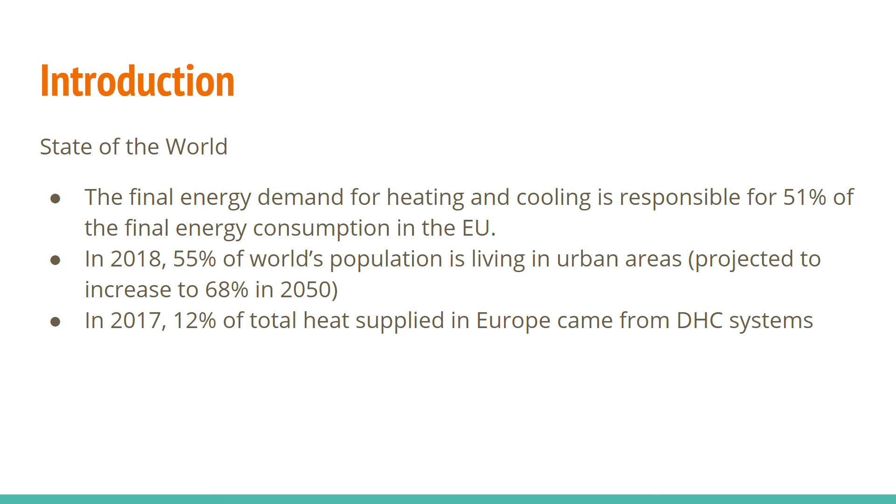And this is definitely expected to be a hot topic because in 2018, 55% of the world was living in urban areas, and with this being increased to 68%, that means a greater demand for heating and cooling in these large buildings in the urban areas. And with only 12% of total heat supplied in Europe coming from DHC systems in 2017, there's a lot of room for growth in this area that can make the system for heating and cooling more efficient and more environmentally friendly.

So what exactly are district energy systems? Well, they encompass electrical, gas, and thermal systems that are constructed in urban areas that help distribute flows through the power grids and pipe networks. So if you see in the figure, there are 4 arrows. There's one for the electrical network, a transportation network that includes the electrical vehicles, and there's also the district heating network that we will be discussing specifically for these two papers. And then there's the gas network, and this is how the urban areas are connected. They communicate with all these different resources to power the day-to-day.

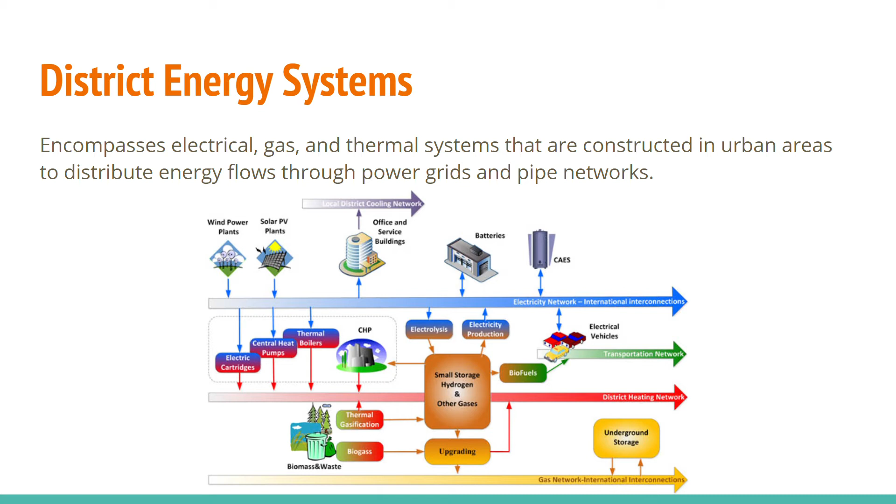And the paper's focus is on the DHC networks, and that's specifically the thermal system in the district energy system. What they are is a distributed underground network of pipes that deliver cool and hot water, and the water would help heat and cool homes or offices and business workplaces. And if you see on the right, there's also opportunities for waste heat to be utilized for this network towards heating and cooling, such as sewer waste heat being redirected towards the water heading to the residential homes.

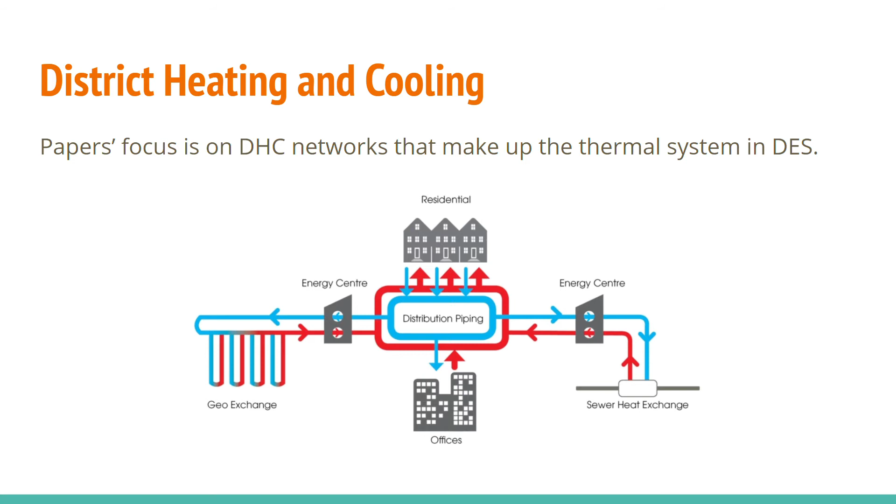So DHC networks have come really far since the 19th century when steam delivered heat was first considered, and in generation 2 the steam was replaced with highly hot pressurized water, and then that moved to generation 3 where we used less hot water, and we built more durable pipes to survive the high temperatures, which required a lot of insulation and durable materials. But despite that, we still faced high wear and tear of the pipes due to the 80 Celsius water. And despite very high efficiency at the generation level of the heat, when distributing the heat there's 10 to 30% losses.

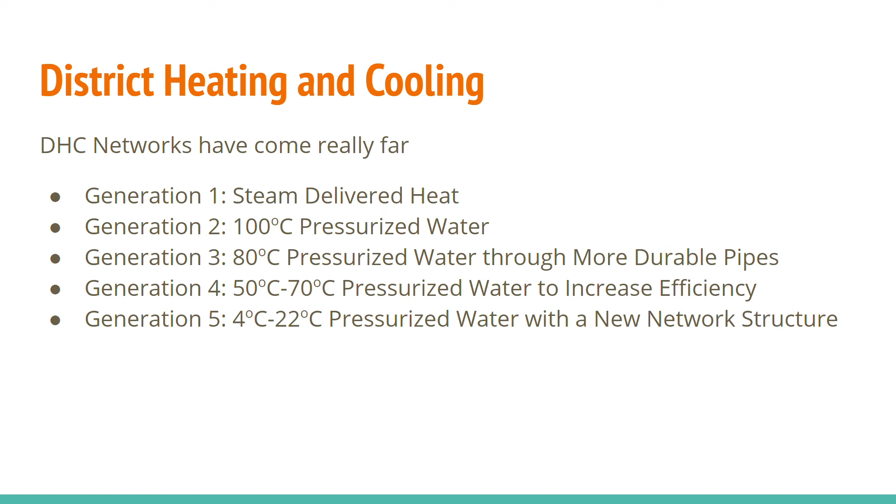So that's what generation 4 helps to solve. With lower temperatures, we increase the efficiency because pipes are worn down less. But generation 4 comes with its own issues, including the fact that 2 pipes are still required, one to send hot water and another pipe for cold water. And like all the systems before it, it has only one central station that heats up the pipe's contents to the desired temperature. So in generation 5, we want to tackle these 2 issues faced by generation 4 with a new sort of network structure.

So the new networks are comprised of heat storages that can store excess heat away for future use. And the pipes are now cut in half. Instead of 2 pipes, there's only 1 pipe, and it's bidirectional with a single temperature. If you remember from the previous slide, it was like 4 Celsius to 22 Celsius. And because of the low temperature, there are local substations, which is at the building level, like a heat pump at the bottom of an office to help step up or step down the temperature.

And this network really makes use of the idea of prosumers, producers and consumers that are connected to the network, because now anyone who's connected can contribute to the thermal network and also take away from the thermal network. So for example, a nuclear plant can utilize the heat and the cooling from the network, but the excess heat generated by the nuclear plant can be delivered to the network, and that energy can be shared with residential homes and help make energy prices and heating prices lower in general, because we didn't need to spend natural gas to do so.

And there are currently 2 experiments being done and implemented for 5th generation DHC networks. One is done in Zurich and another in Sweden. But I think it's very expensive because these building complexes that the 2 research groups have built up consume gigawatt hours of energy per year, and the data that they're getting is on a real-time scale. So that's costly and time intensive, and if we want to really develop these networks sooner, we should have a modeling software that can model the 5th generation networks very well so that we can understand the nuances of how parameters can affect the output of heating and cooling.

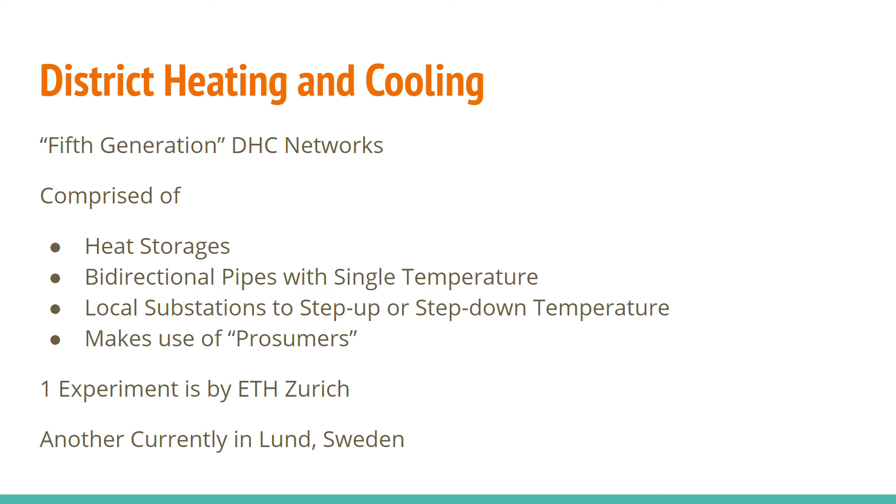So modeling tools are very helpful for rapid prototyping, because if you can quickly change a system without building the system and understand how the system would react in the real world, then we don't need to spend as much money and time thinking about whether a design works. We can just test it, and this can reduce a lot of their development costs.

And so it'd be great if we have these tools, but simulating these systems is hard because these systems are very multi-domain. It's not just a single circuit or a single thermal equation. It's multiple thermal equations that react with multiple electrical equations, and which also react with a lot of the physical and flow mechanics of the system. So there's a lot, and the math involved is very hard. And so there are tools that can model just the thermal system, or just the electrical system, or just the flow system. But there's no tool that can do all of it at once.

But the tools that can do singular systems work pretty well, and a popular one is an open source software called Modelica. And it includes model libraries for buildings, chemical systems, Arduinos, electronics. And so Modelica libraries provide a lot of singular domain support, but we can make use of this interface called functional mockup interface to help perform co-simulation. So we can tie multiple models and simulators together to model a simulation for a district heating and cooling network.

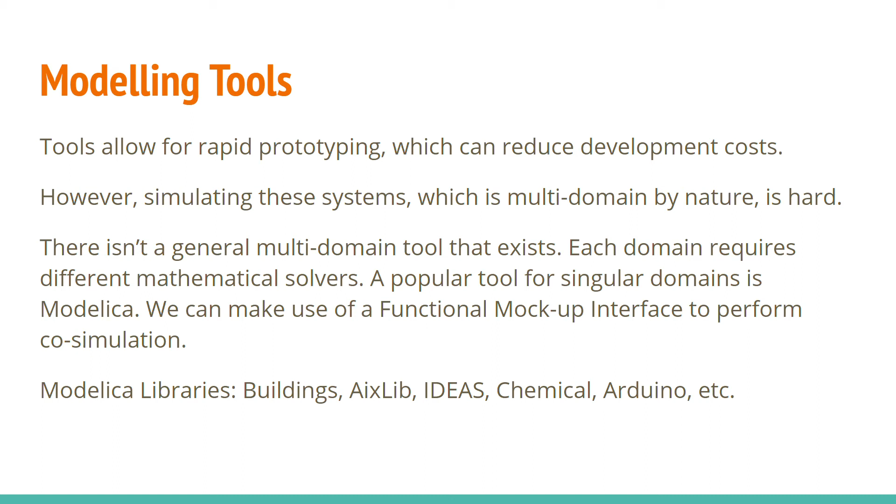So let's say we have a network that has thermodynamics and flow dynamics. We can use this functional mockup interface standard to control how simulators are run and how the data shared between them is communicated. So the thermodynamics might be in differential equations and the flow mechanics might be a very linear system. The FMI would tell them how far to step in time for each calculation and how to transmit the data that they've calculated between each time iteration. And so this is how we can model a full thermal and flow system without having a tool that can do it all.

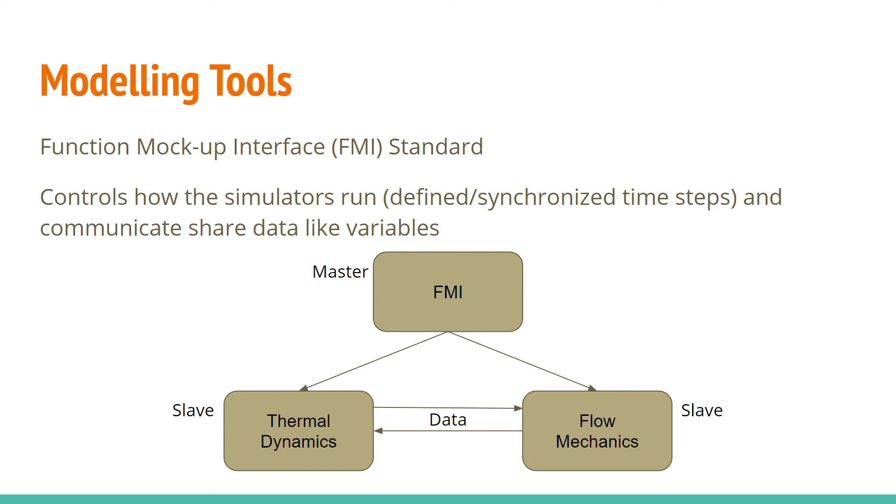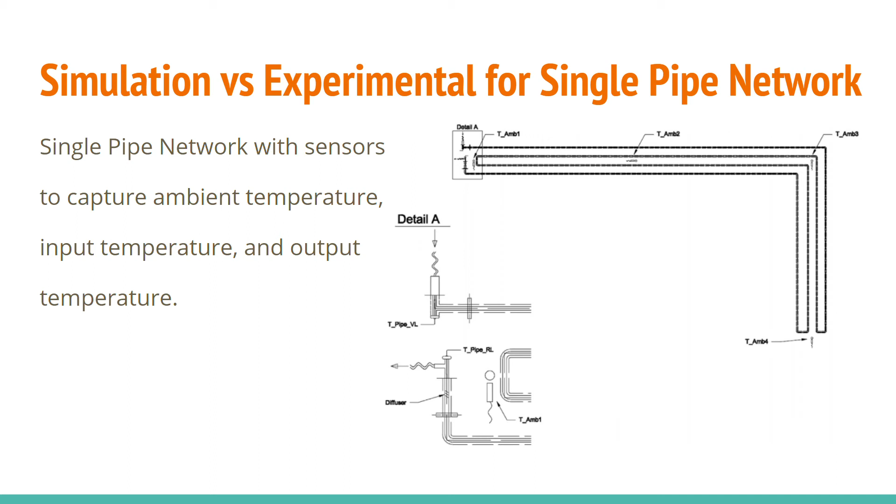What the experiment wanted to see is how the output temperature responds to input temperature. So in case 1, the input temperature is raised from 24 Celsius to 74 Celsius, and we want to see the response at the output end to see how quickly that responds to the change in input. And similar for case 2. Case 2 is a decrease in temperature from 23 Celsius to 10 Celsius, and with the decrease in input temperature, we want to see how the output temperature also changes.

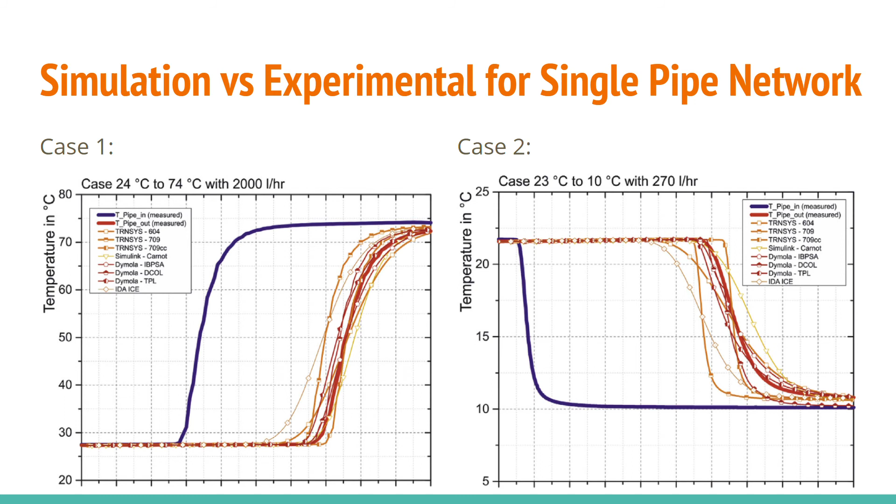And then in the second case, we have other outliers, like maybe Simulink CARNOT. It decreases in temperature later than the output does in the experiment. So overall, the best tool for both cases, with the least error overall, is Dymola DCOL, which is based off of Modelica libraries.

But we also care about how the models and simulation tools represent the steady state, because when we're heating and cooling buildings, we really care about how the temperature responds in the long run, and we wanted to keep it consistent. So TRNSYS 604 and Simulink CARNOT were best for steady state error.

And in conclusion, the paper states that any of these 8 models can be used for district level analysis, so for very large, city scale analysis, but not for HVAC applications where it's room dependent and needs that much fine granularity.

So right now, a lot of the research is related to co-simulation, Modelica, and building simulation, but there have been some new papers published dealing with cyber-physical simulations and high energy efficiency in buildings. So as the existing tools become better, there will be more opportunities for us to incorporate more complex systems and analyses into the equation.

And my recommendation for the states is to begin implementing and testing more 4th and 5th generation district heating and cooling networks in the new infrastructure they build, or if they're tearing something down, to implement it there, because I know it's too expensive and unrealistic to overhaul the entire system they currently have implemented. I believe building these will help increase efficiency and reduce greenhouse gas emissions, because we can share a lot of heat very quickly and efficiently.

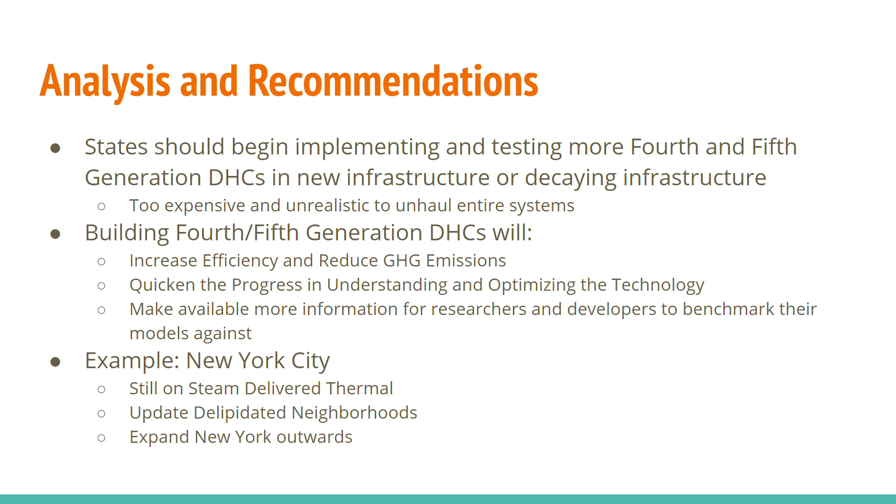A prime example is New York City, which is still currently running on steam, so they're not using water just yet, which I think could be utilized in maybe some expansion projects or in dilapidated neighborhoods, maybe where gentrification is happening. Since New York City is such a rich city, we could possibly get a lot of progress done in this space.

We also believe that states should update their incentives so that they can prepare their prosumers for their energy goals and the possible future DHC network. This can allow them to work with researchers to set a standard for what type of heating equipment is used in buildings. This allows researchers to understand the type of load to expect on the power grids, and also the thermal and flow parameters of the receiving end in the DHC network.

This increased collaboration will also mean more money and more data go towards researchers, and this helps speed up the process. Another example, staying with New York State, is that they currently have rebates and cashback for installing natural gas heating equipment. I think if they can work with researchers to define electrical heating equipment, then we can reduce the amount of natural gas used for heating in general and better prepare buildings to connect to future DHC networks if they decide to move forward with it.

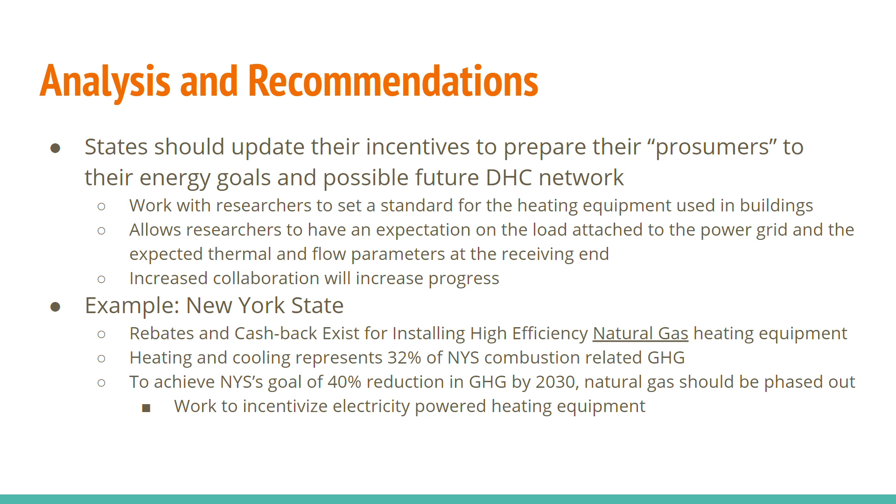And yeah, I think natural gas should be phased out soon, just to reach the goal of a 40% reduction of greenhouse gases by 2030 and 85% by 2050. That's very significant, and so I hope these changes could help tools be developed sooner, so that when these tools are developed and these networks are built, the transition is very smooth.